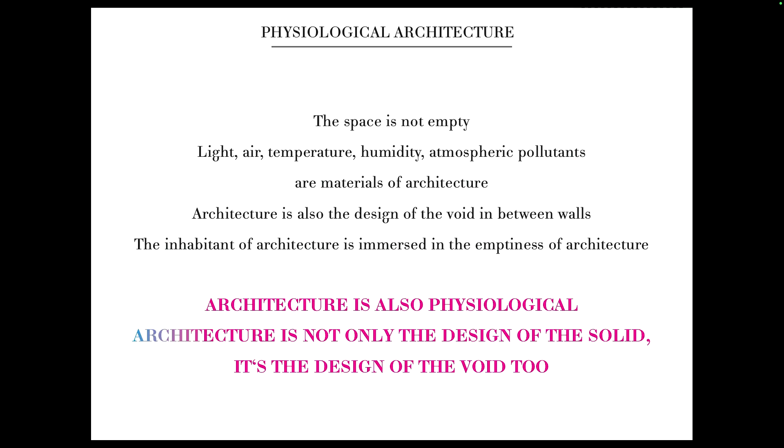I first opened an office in Switzerland called Decosterd & Rahm Associés, until 2005, and we represented Switzerland at the Venice Biennale in 2002 with this book, Physiological Architecture. At that moment, it was very important for me to explore the core of architecture, because everybody was talking about the wall, the image of a wall, but in reality, the target of architecture is the void itself, it's space, and so how to define space by the physicality of the space.

A first project we made in 2002 was for an artist, Fabrice Hybert, in France. In reality, here we were thinking that in Paris, during the winter, when you have a radiator, you are creating 20 degrees Celsius, so it's warm even when it's cold outside. Then during the summer, you want a more temperate climate when it's hot outside. In reality, it was like recreating in real time the climate of Tahiti in France. When you have a radiator, you are making a shift of latitude, bringing a climate that really exists on the planet at that time, but bringing it somewhere it doesn't exist. So we said, okay, let's take everything from Tahiti to France, in La Vendée.

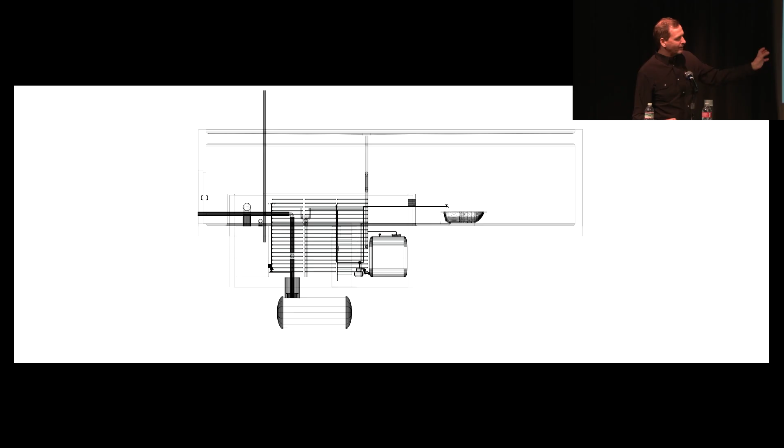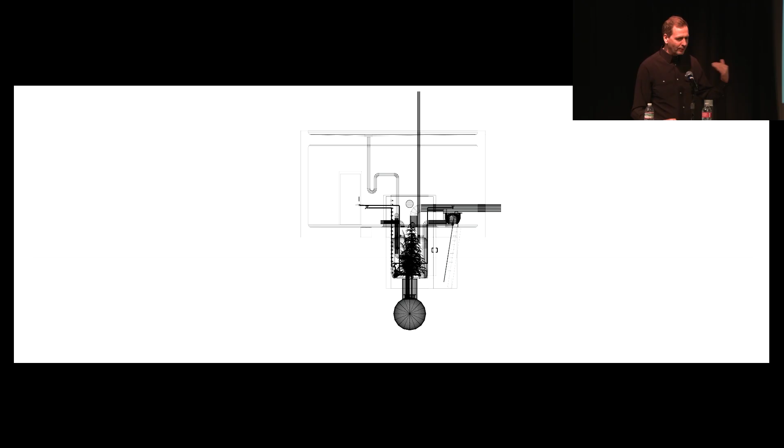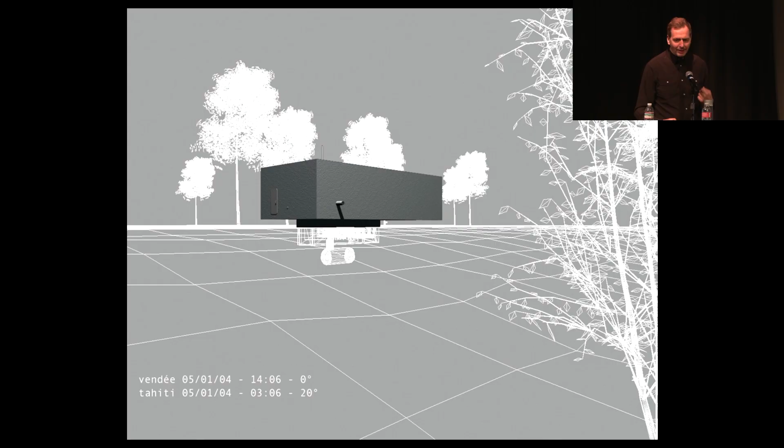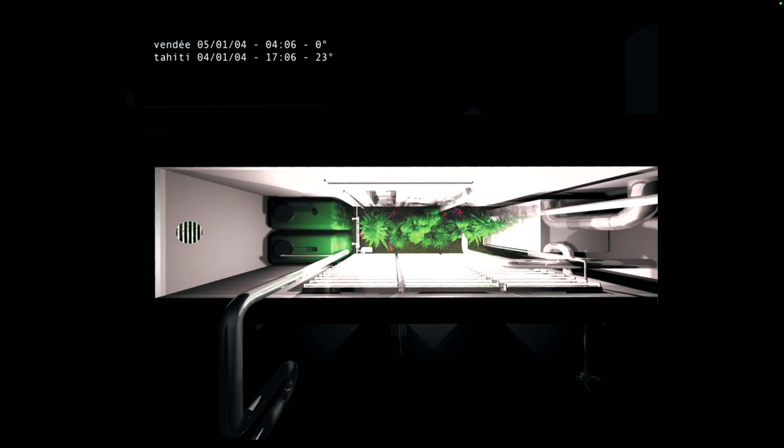We introduced that in the center of the house, producing light, heat, and also the smell and the plants of there. So the central heating room was like the main core of the house. It was like a house in jet lag, because it was producing light as if when it was midnight in France, it was noon in Tahiti. So it was like a machine turning like that. At the end it was completely opaque, full of thermal insulation, but everything was inside. It was like this jet lag house, working and creating the smell and heat of Tahiti in France.

Then in 2001, we were invited to SF MoMA, and here it was also this idea of how we perceive architecture. We often talk about the visual, but in reality there is information that goes beyond the visual, through the brain and through hormonal perception. At that moment, we were thinking about light. Light is a very common element of architecture, like in my time, Tadao Ando was known for very beautiful lighting. But lighting is not only aesthetic; it can be physiologic.

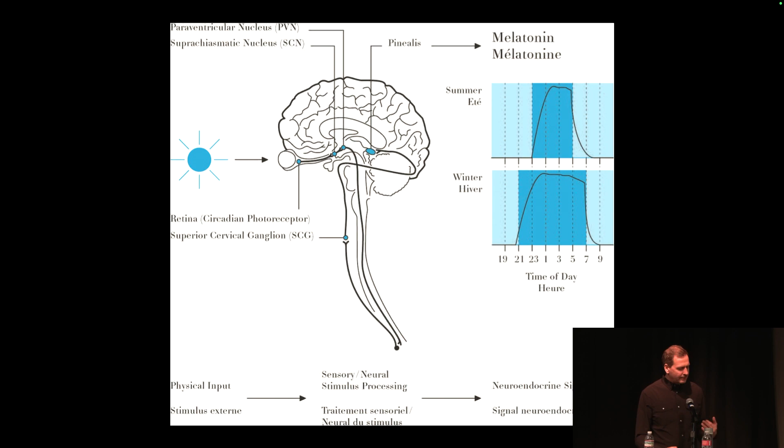We know there is a relationship with melatonin: when you have no light during the night, you produce a lot of melatonin. There was an experiment in 1980 by Alfred Lewy showing that if you turn on the light, it decreases secretion of this hormone, inside the brain, inside the blood. We know that very bright light blocks melatonin—at that moment the color studied was green, but then it became blue.

So we proposed to make a room that was no longer a social space like a living room or bedroom, but a melatonin room. One was like an exciting room—you went inside and it was blocking the melatonin. The other was emitting, more like orange or red—now we know it's very popular today, like night shift on your iPhone, which blocks blue light. But at that moment we didn't know exactly the wavelengths. I was part of a symposium in Eindhoven, around 2005, when some researchers showed the blue and the orange light. It was an interesting moment.

Then in 2002, we represented Switzerland in the Swiss pavilion, with the Hormonorium. It was like, okay, let's really work on the space, on the interior space, without talking about the limit of the space, but really on the matter of the space. And the space is not empty—it's composed of gases, of electromagnetic waves.

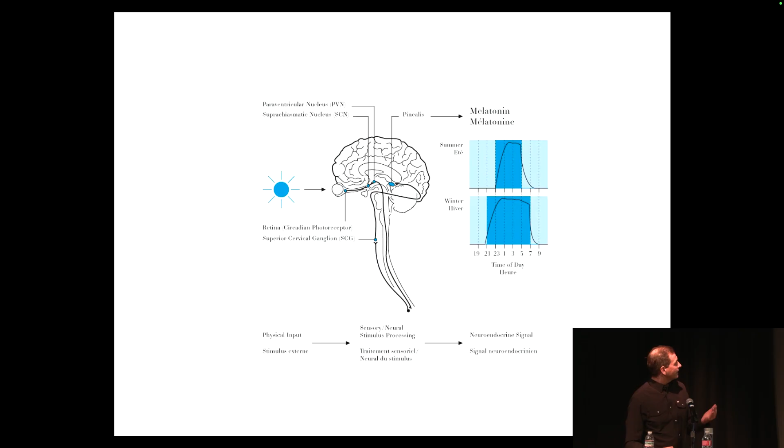And then we made this Hormonorium. It was working on two elements, and the perception of that was not in the visible, but like hormonal perception from the light, through melatonin. So we have a very bright light, and then we decrease the level of oxygen inside the space by adding nitrogen. So it was no more like 21%, like it is at sea level of oxygen, but only 14%, like 3,000 meters of altitude in the mountain.

So in reality, it's a little like going immediately - you open the door and you jump into the high mountain, and you have this bright light coming from the ground because you cannot escape it. You are receiving it, the melatonin is blocked, and you have this lack of oxygen. The perception of that was completely hormonal, no more semantic or aesthetic. I think it was just to say that architecture is not only aesthetic, it's also about health and pollution and things like that, so it was important for us to talk about this.

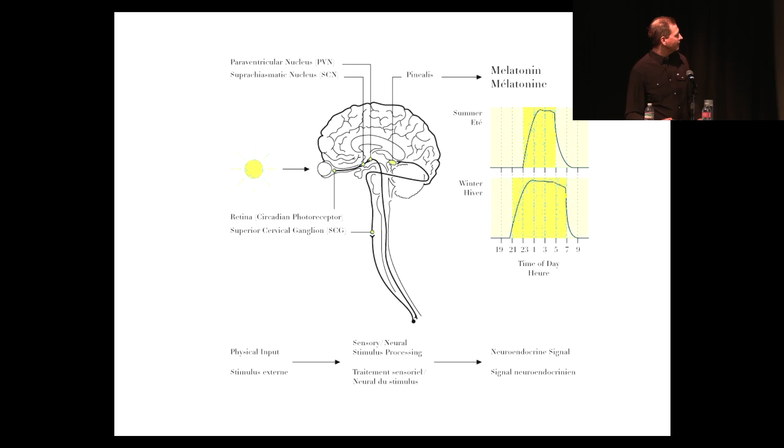So it was like somnambulism, living the night during the day. And this was the range - the blue light is blocking melatonin, and after 600 nanometers, you have no effect on that. So we chose these wavelengths, and emitted that in the space.

And then at the back, we created this kind of black cooling screen that was a little like the night vault, and then we reversed the music - you have the nocturne for the piano of Chopin, but it was invented by John Field. It's interesting because the invention of the nocturne, this type of piano piece, was invented in the same moment as street lighting, at the beginning of the 19th century.

And so the nocturne - you can listen to it during the day, it's like an evocation of the night. So here, by reversing, by creating diurne, it's like evoking the day during the night, something like that.

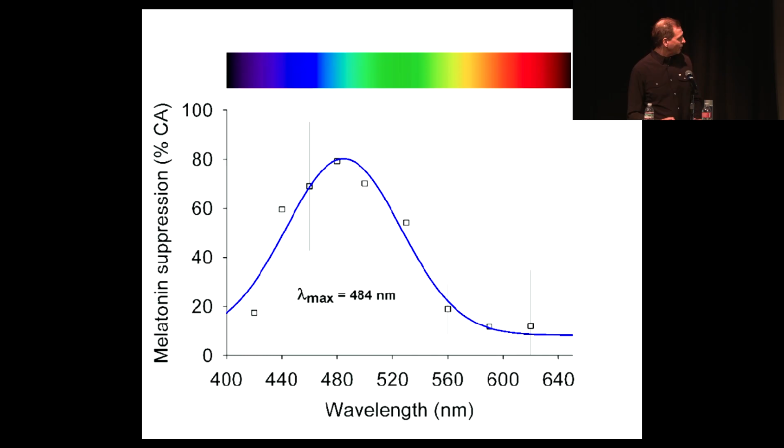Then we realized something like that based on melatonin, a kind of melatonin cafe in Taiwan. It's based on the yellow light being like the night, the blue light being like the day, and we proposed to make a cafe where you can move not inside space but inside time. So it's like time design.

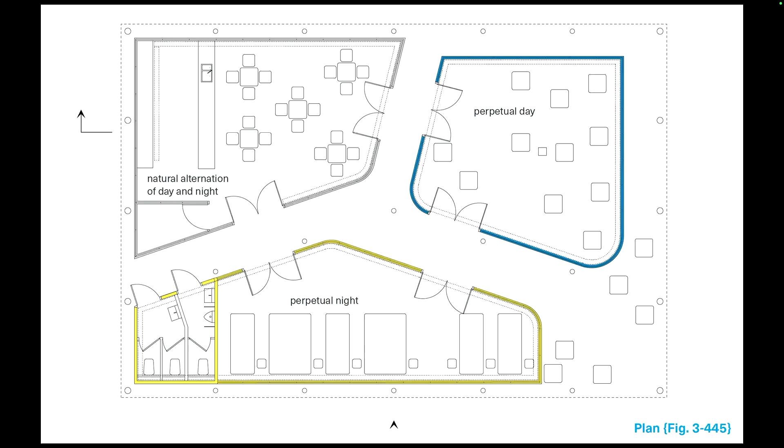So you can go into the night or go into the day, or go somewhere that moves with the astronomical cycle, and at the end it became like that. You can enter different types of rooms with different effects on melatonin. The yellow one has no effect on melatonin, and the blue light blocks melatonin.

Here, this is a project also based on wavelengths. We made that for Artemide, a lighting company in Milan, Italy. And the target was to create the most economic light with the most healthy lighting.

That's why the LED spectrum was better, and LED was only in the visible range. Depending on the semiconductor, you have different wavelengths, and this gallium is producing that. So you have different semiconductors producing different types of light, and when you assemble them, it creates a white color or some different type of color.

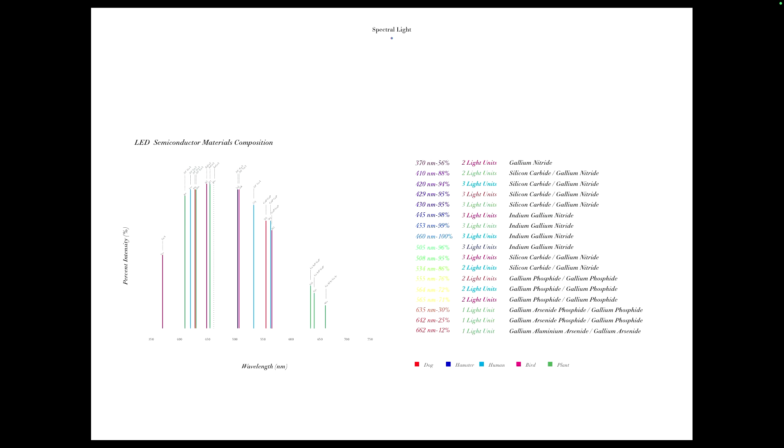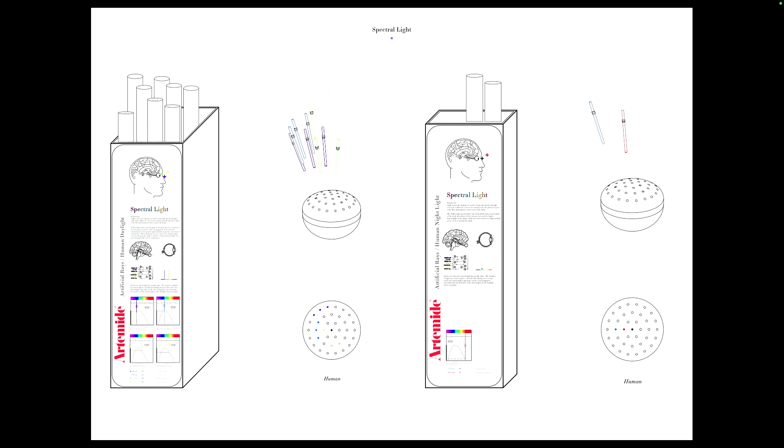And then at the end we proposed, okay, you can have light for human eyes, so you have three cones, three types of wavelengths. And then for the hamster, for the birds, and then you assemble all together. And then it becomes like a white light all together. And then you can decide in the house, you have that.

If it's only humans, you can turn on only the wavelengths for humans. If you have a dog, you can turn the dog wavelengths too. And then it becomes like that. For the show in Milan, we create like what are the wavelengths for a bird or for a dog. This is, I think, the vision of the dog.

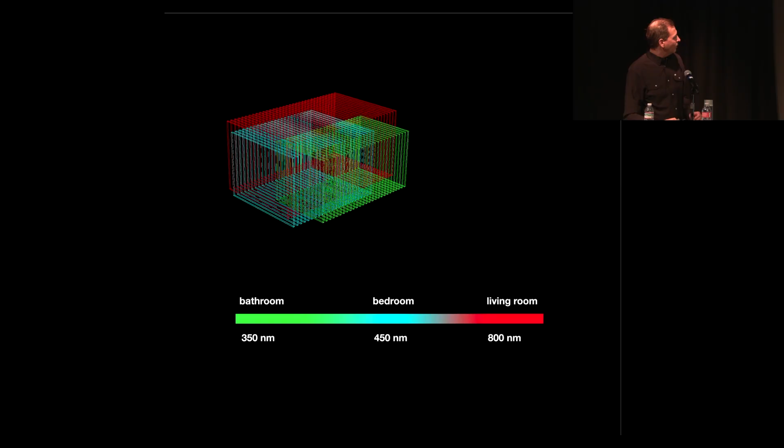It was also another project we made about wavelengths in Kitakyushu, Japan. It was the idea of ghosts, saying maybe if we want to make a 60 square meter apartment, but inside 20 square meters, we can do rooms, not different rooms in different space, but in different wavelengths. So we propose to have the bathroom in ultraviolet, the bedroom close to blue, and the living room inside red.

So then you turn it, so it was like that. When you turn the red, you only see the living room, like that. And then the black line, one line is the bathroom and the other one is the bedroom. So when you turn the other color, then you see the bedroom. And when you turn the other color, then the bathroom appears.

So everything was like the idea of ghosts in the 19th century, like there are different parallel dimensions, but on the same space. So it was a little like that, and then all together it's like that. And then the book was also, you can read a different story with that.

A project we made also on light was this winter beach. We proposed to rebuild a kind of beach during the winter, but by using only... at that moment I was reading a little of the 19th century, like Huysmans or Baudelaire or Jean Lorrain, this kind of literature. And the idea was the idea of synthesis, like to decompose the world, which came from chemistry, to decompose reality into elements and then recompose.

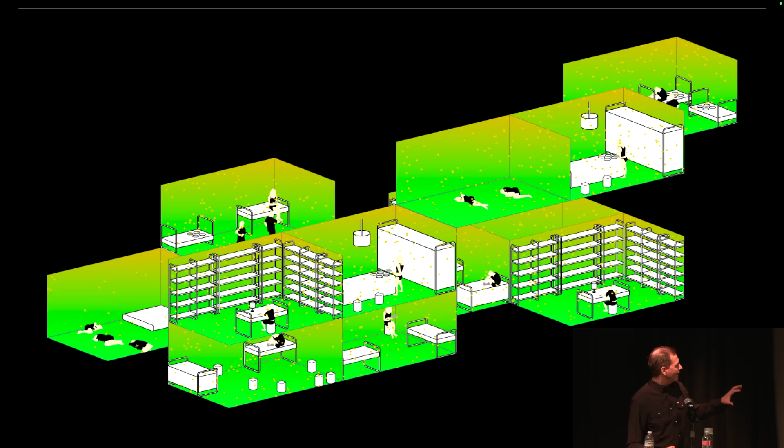So it was a little like this kind of thing, creating like - okay, you can sleep here because there is not a lot of light, but it's super hot and very dry. So what type of space is it?

This is this book, Climatic Architecture, and maybe this is closer to what I'm doing now. The idea is, okay, let's design directly with climate. Maybe we don't need to use geometry or metaphor - let's try to use emissivity for choosing a material, or let's use convection for composing a plan. I can show some examples of that.

Effusivity - this is, you know, the speed of exchange when you touch an object. So between materials, if you have marble, it becomes cold, you feel cold very quickly because it's a high effusivity material. If you touch wool, you feel warm because it's a low effusivity material.

In reality, this is something that was used before air conditioning or before radiators for heating or cooling. For example, all the marble floors in Italian churches were for cooling - you can find this described in Viollet-le-Duc or Claude Perrault. They talk about this kind of material. During the 20th century we think marble is only for showing that you are very rich, so you choose marble, but in reality marble has this kind of effusivity value.

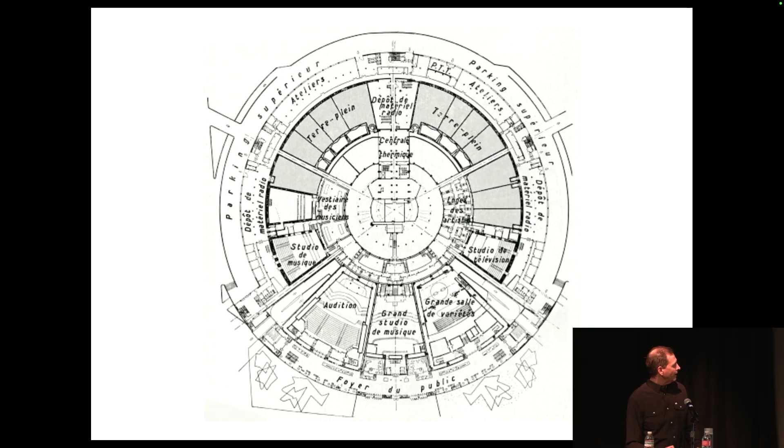For that project, which is a competition we won in 2017, it was for the center of the Maison de la Radio in Paris. They want to transform that into a kind of public space, with a cafe and some other public function.

And then we start with the cafe and we ask ourselves where we have to place it. Maybe during the winter you are looking for sun and heat, and during the summer you are looking for shadow and coolness. So we cannot just say the location of the cafe is good here, but rather have a kind of gradation.

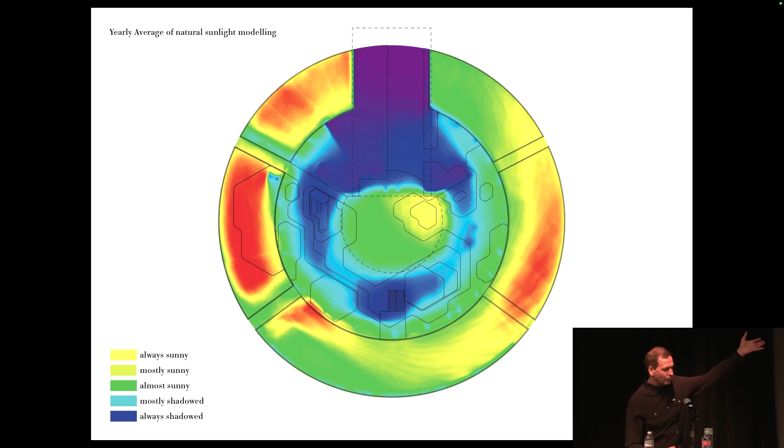So from that we made a solar analysis of the space, and we can see where it's red there is a lot of sun, more sun, like an average during the year. Where it's blue, it's mostly shadow. And from that we place, in reality, a gradation of the cafe from hot area to cold area.

And we materialize that. We choose the material to follow this climatic quality. We say, where it's hot, where there is sunlight, let's place some wool because it will be good for winter. And where there is no light, let's place marble because it will be good for cooling. Then it became a choice between wool, a low effusivity material, and a high effusivity material.

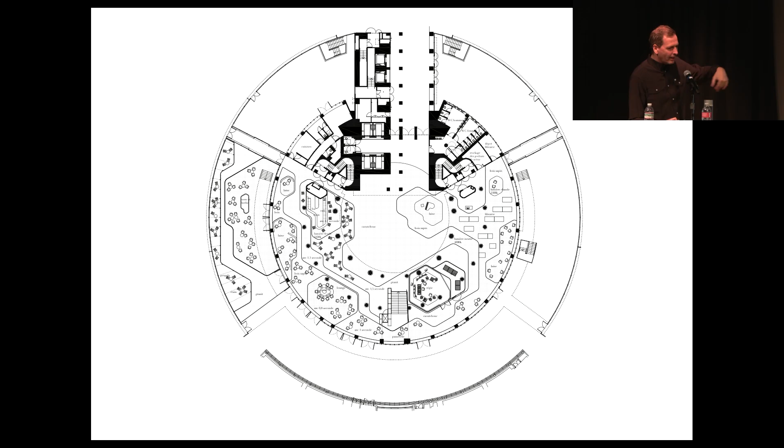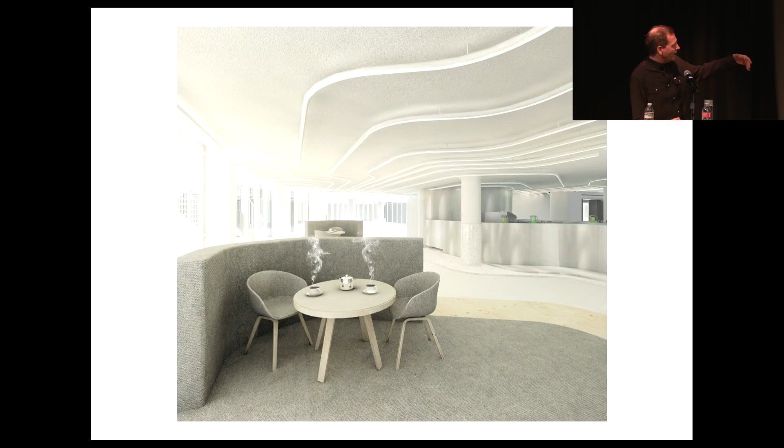So there is this type of gradation following the line of the light model, and finally we can see that. This is the sunny area where you can find wool, so it would be very comfortable in the winter, or maybe in a cloudy summer day.

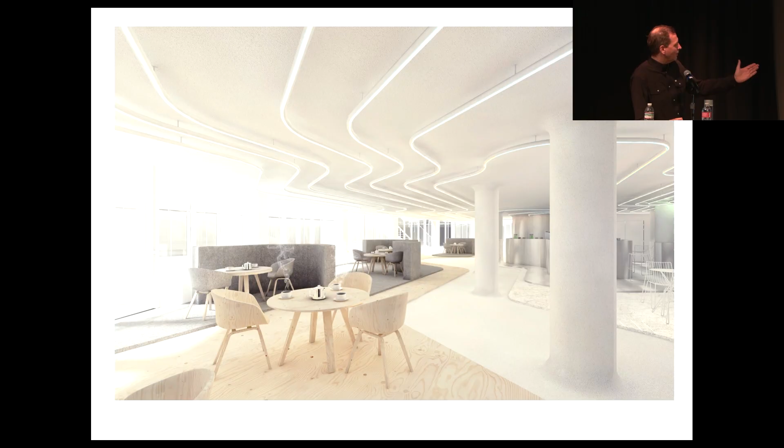And then we move to the wood, with a little higher effusivity, and then we arrive to the marble, and then the most high effusivity, like le zinc. It's typical Parisian, like the zinc, in the cafe.

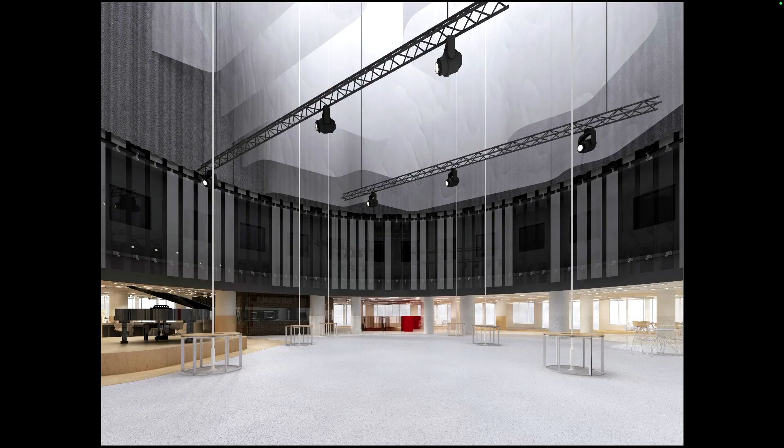Another point about convection, how to design with convection. So convection is like the hot air moving up, and it's also a way of cooling by having some air moving around the skin. So by convection we made a different project.

We were talking about Domestic Astronomy, an exhibition we made at the Louisiana Museum, about how to economize energy. In reality, nature sometimes is not so ecological, because the hot air is always moving up, so during the winter you are always cold because we are down, and the cold is always down, and the heat is always up.

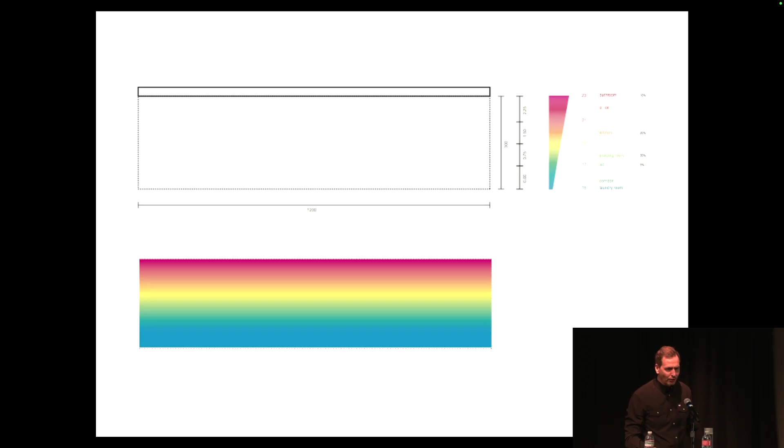So we are not placed in a good way, because if we are cold on the feet, we turn on the radiator, but in reality everything becomes hotter under the ceiling, not on the feet. So from that we say, let's work with this idea that in reality the function should not be placed on plan, but on section, on the altitude linked to the convective movement of the air. The hot air is up, and the cold air is down.

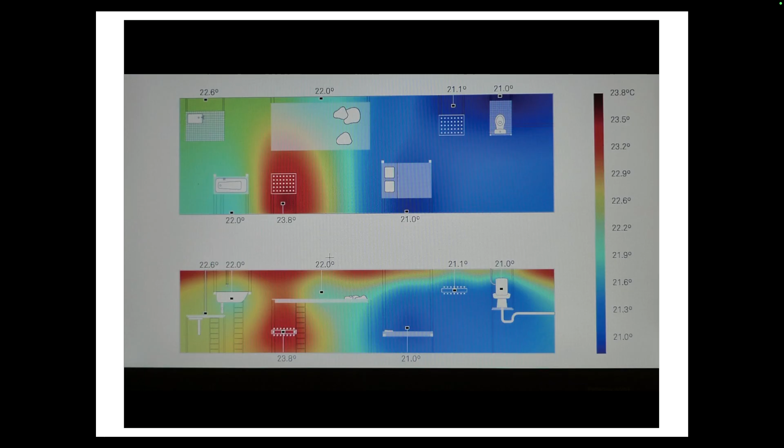Depending on the function, for example if you are naked and take a shower, there is some recommendation for having a higher temperature in the bathroom than in the bedroom. So we say, okay, let's place a bathtub close to the ceiling, and we can put the bedroom down to the ground, and then it became like that.

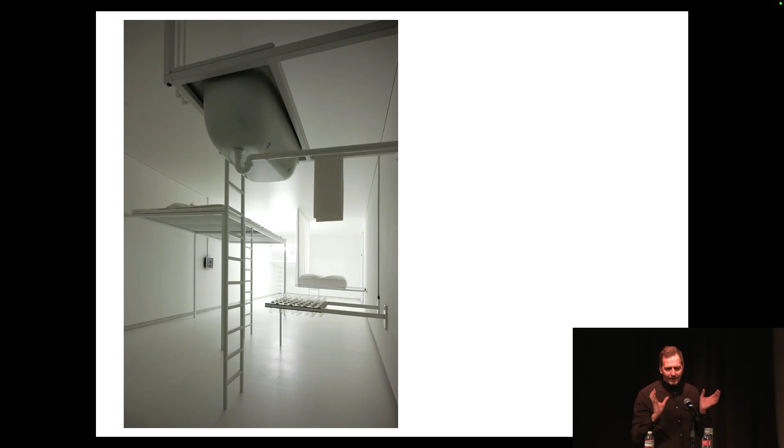So it's just to economize the energy, because naturally we have a lot of heat under the ceiling, so let's go under the ceiling. So it was like that, and we can see this different altitude with the bed going down and the living room a little lower, like that.

And then we made a project for the artist Dominique Gonzalez-Foerster for a house. It was based on that. Because there is some recommendation in Switzerland to say the corridor can be at 15 degrees Celsius and bathroom at 22 degrees Celsius. So we say there is this range of comfort, let's place a radiator for producing 15 and another one for 22.

Because the hot air is moving up, it creates an atmosphere with different values, with these two radiators as the polarity of the low part of the comfort and high part of the comfort, 22 and 15. This creates convective movement of air, and we can see different types of temperature created in the space, and we place the function according to that. So the bathroom in the hotter area zone, living room in between, kitchen there because we are moving a little so we don't need to be at 22, and the bedroom a little colder.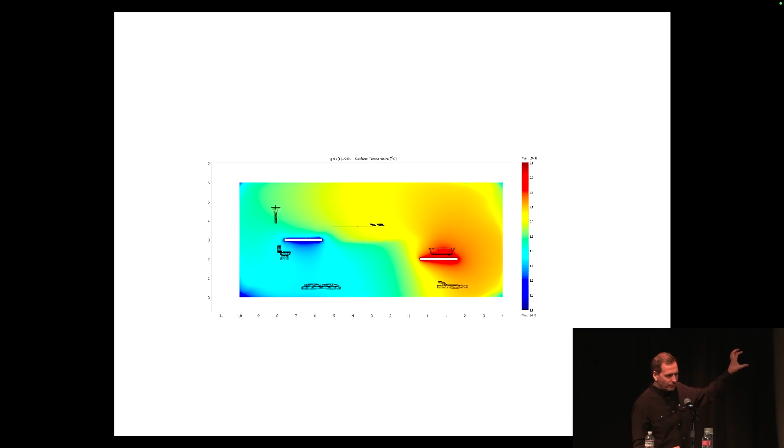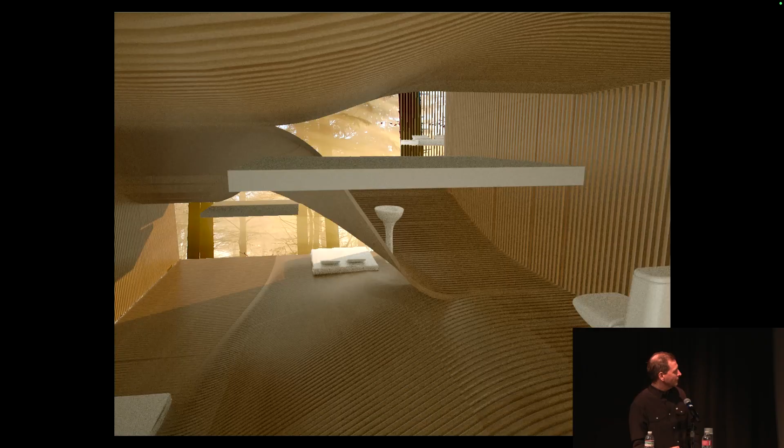And we place first the object, the furniture, and then we connect that with the floor, but the floor has to have holes, you know, to let the air move everywhere, like an atmospherical interior. And so it became a little like that, with this kind of open.

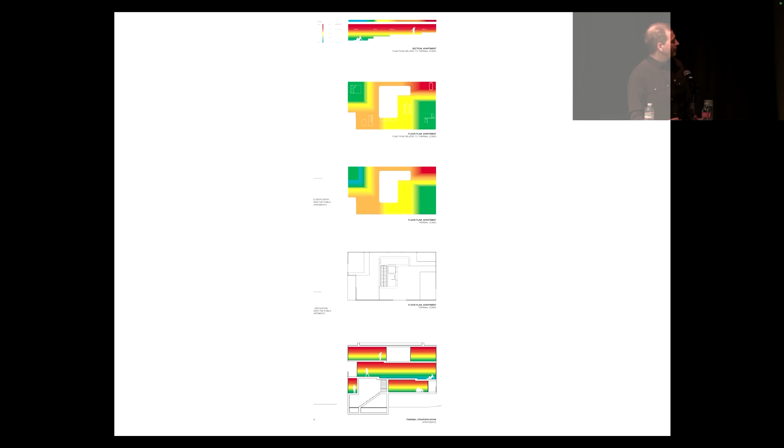Yes, and we made another project with that for Hamburg, where in reality you can move up into more warmer layers and go down into lower ones. So there is this kind of winter area or summer area. It was like that.

And then this apartment, so this is some Swiss recommendation, 22 degrees for the bathroom, 15 for the toilet and the other. And then here we also place the sinks according to heat. So we can see the bathroom at the top, kitchen down.

And then we propose to have the sofa for one person a little higher than the sofa for two people.

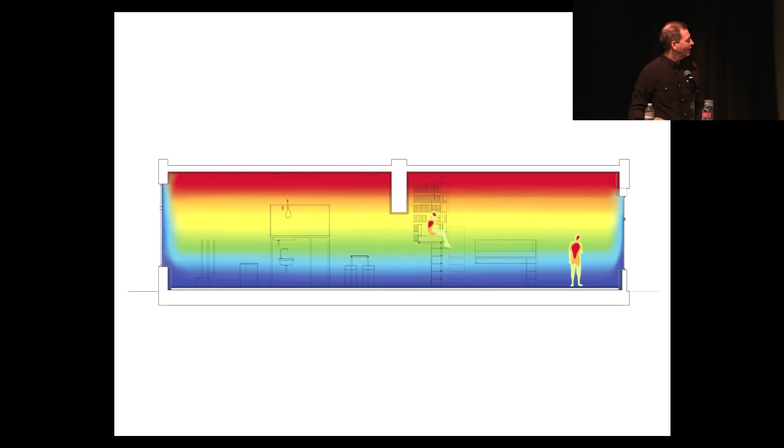And then there is also something about humidity. You know, if you have one ventilation system, you have to bring the fresh air in where you don't produce a lot of vapor, so it's more the bedroom, and then it moves to the kitchen or to the bathroom. So in reality we place the kitchen and the bathroom together, because this is where humidity is produced, and so it's challenging the way of organizing the house.

No more in terms of social convention, like saying that you have the night part or private part and public part in the house, but here it's just linked to humidity. You have the humid part and the dry part, and maybe it's reorganizing more according to climatic issues, and maybe it can also reorganize as a kind of social consequence of that. So it was like that, more dry, more humid.

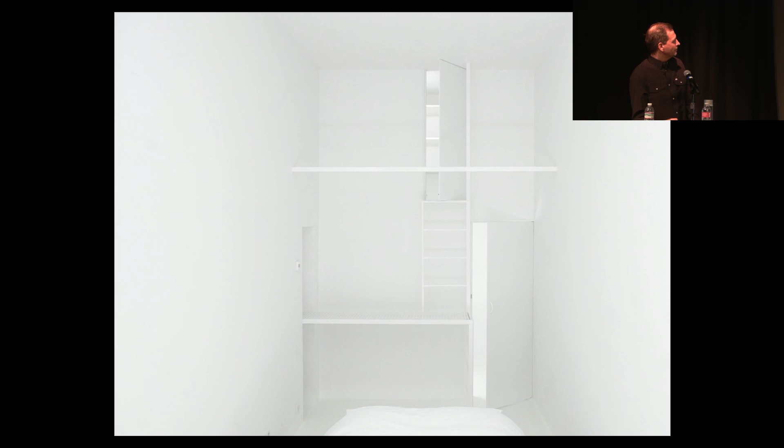Okay, and then also based on convection, we made this competition entry for a university building in Lausanne. We got the third prize, and we used some convective principles of Palladio.

It's really interesting to look back at this project, because when I was a student, it was explained in a very esoterical way about perfection of proportion, with a kind of body lying in a square and a circle. It was very complicated to understand what it was about, but in reality, Palladio wrote a book, the four books of architecture, and he explains exactly the reasoning behind the plan.

He says, in reality, if there is a south, and if the south is here, the sun moves like that. So during the winter, you are looking for the sun. This is like the morning side of a room, because you have the sun here, and then in the afternoon you can go there. But then he says in summer you don't want to receive the sun because it's too hot.

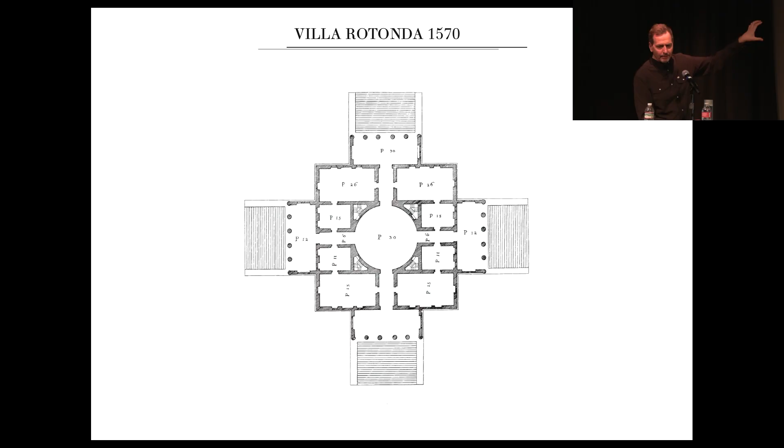So you go here in the morning on the west, because there is no sun, and you are on the northwest. And then in the afternoon you go here. So you go to the shadow during the summer, and you go to the sun during the winter. And so this is why it's symmetrical, because you migrate between rooms depending on the day, the moment of the day.

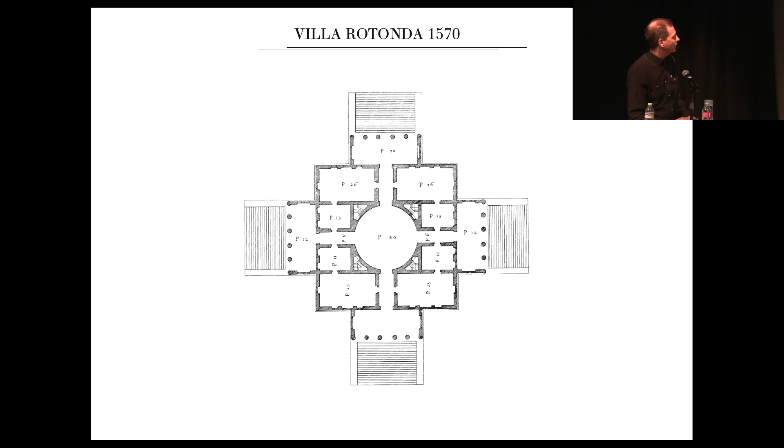And then he also says you have to align window, door, window to have cross ventilation. So he places this portico to protect, to have no light in the center. And then he took some inspiration from the Pantheon in Rome, and you have a hole.

During the 20th century, the explanation for the hole was also very strange, with some mystical light coming inside. But in reality, it's just to let the hot air escape, because if you close it, it becomes super hot inside. It's like when you cook, if you have a lid on the pot, it becomes super hot. If you open it, the heat goes out, and this is the same.

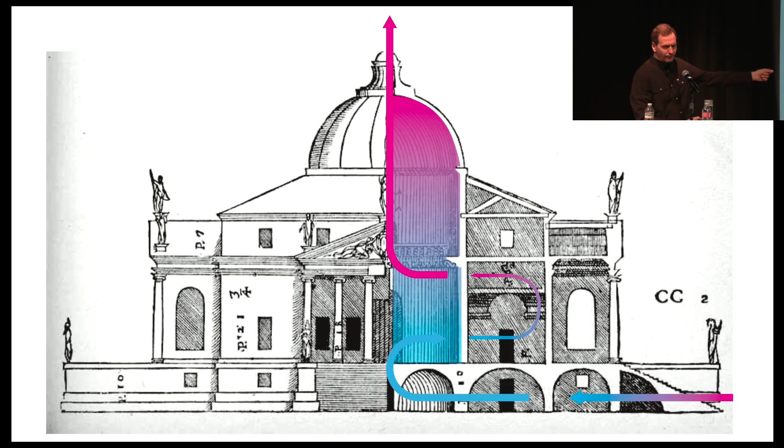You have a hole to let the hot air go out, and so he made that, and then he introduced fresh air down in the underground. So there were other houses built at the same period that introduced air this way. They call it a ventiduct, like an underground cave, and the air is cool underground, and then you have a hole in the middle of the room, and it creates like a fountain of cold air in the middle.

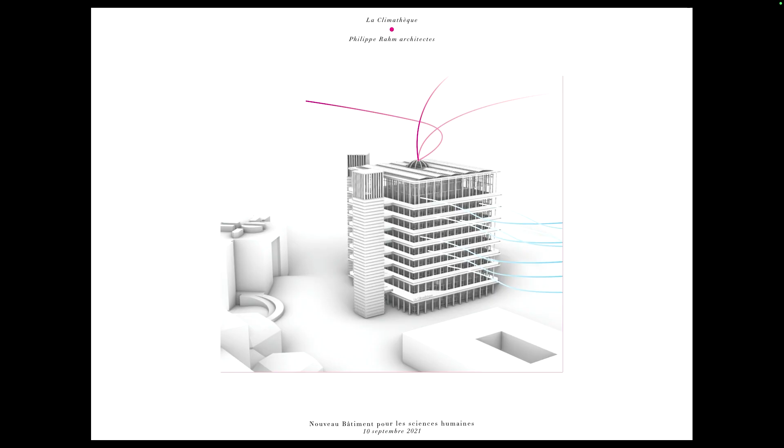So here we can see this stone that has holes, so the cold air can go out, and then the warm air can escape to the top, so finally it's a very climatic machine, this house of Palladio, with its link to the sun and to the air. We took inspiration from that for this building. Here we have just ventilation — you can open the window in spring, and then the hot air goes out, like Palladio, like going out.

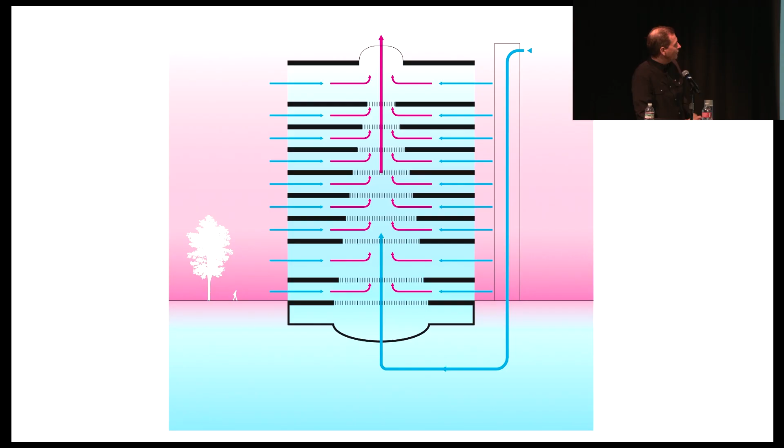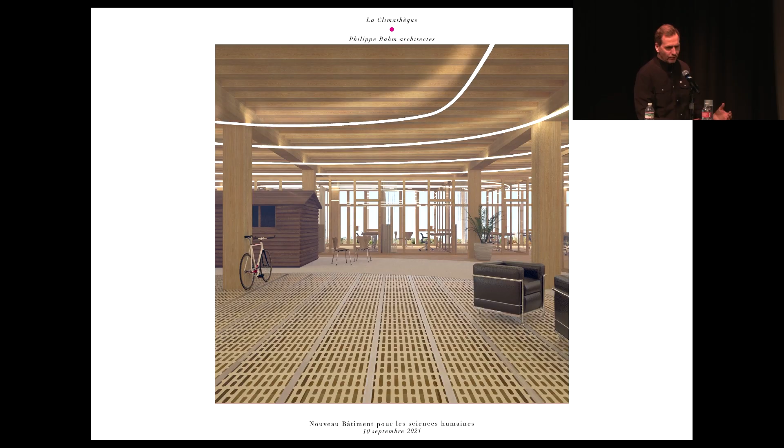We made the same type of stone with holes, with a floor where air passes through. Here we are, in a certain way, removing the duct of ventilation - we are using the building itself as a duct.

Then during the summer, or when it's super hot, we go down with geothermal cooling. In reality, the university is built on the lake of Geneva, so 3 meters underground you have water, and then we propose to make...

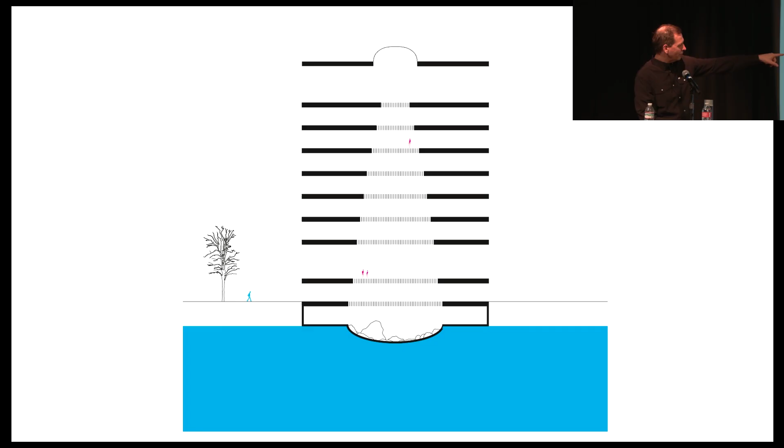Holes in the ground, so during the summer you can open and let the water go inside the building, at the base, and then you can introduce new fresh air from underground - it becomes like a water pipe, or like a narghile.

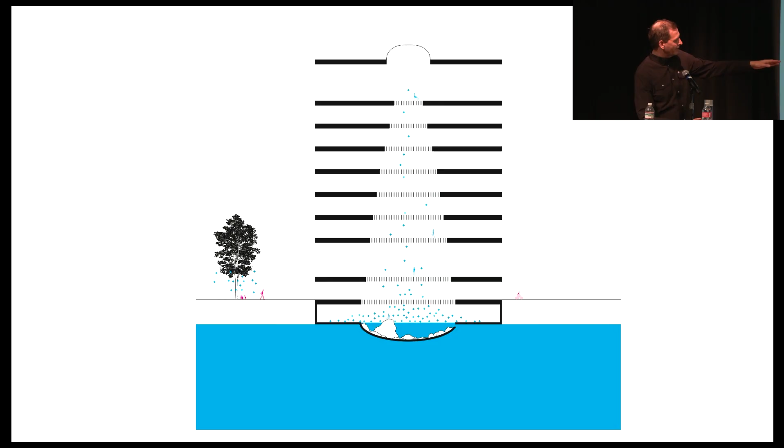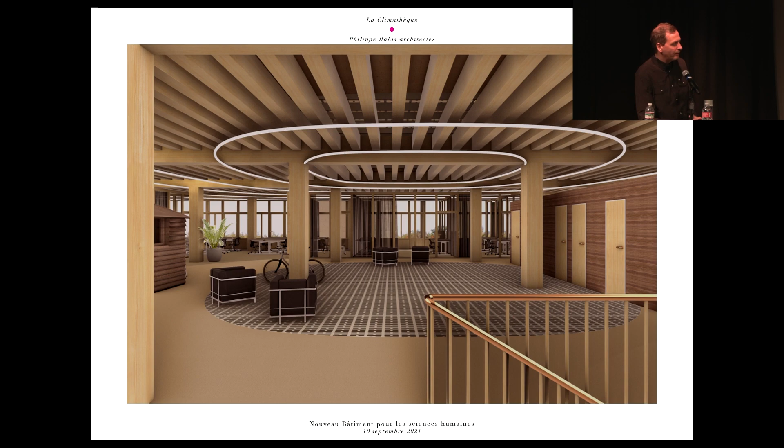It's like cooling the air by evaporation, by thermal inertia from the underground, and then by evaporation there, the fresh cold air during the heat wave can go into the different rooms. So we can see the section with this kind of internal lake, and the new air arrives from there.

Another topic is about radiation - I can show how to design by radiation. So we made something for the Luma Foundation in Arles, about how to place space according to the existing light in order to decrease the consumption of electricity.

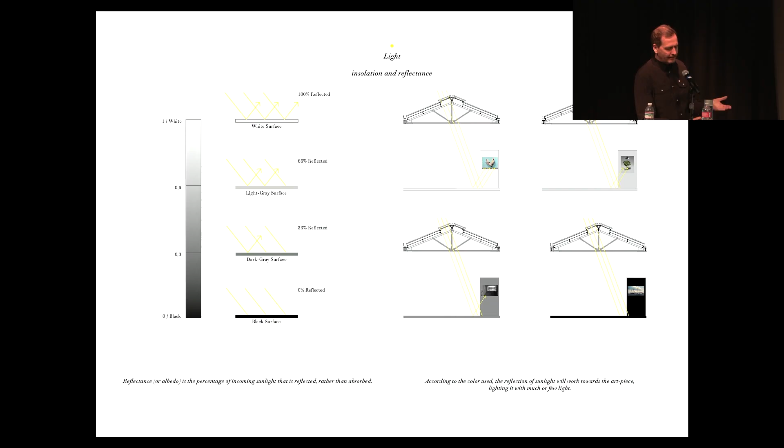Here we analyze the incoming light, and then depending on the type of ground, it increases or decreases the light. If you have a white floor, it becomes brighter. If you have a black floor, it becomes darker.

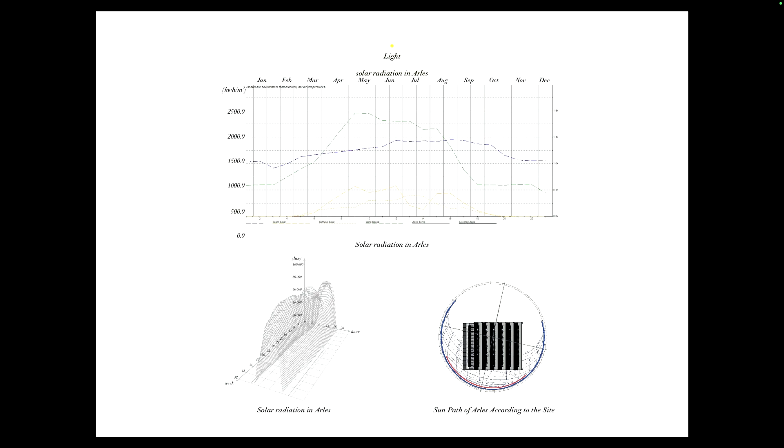So we made a simulation, and we see that here in blue there is mostly shadow in the morning, and then in red there is a little more light - this is at noon, this is in the afternoon - and then we mix all together.

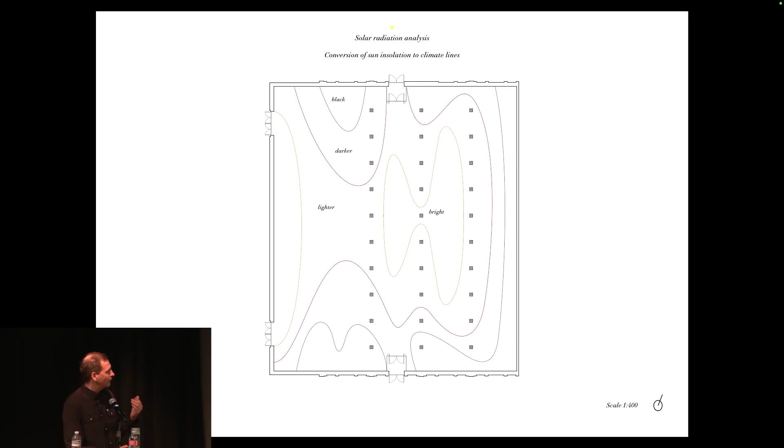We find that here there is naturally more light, here naturally less light, so we can place different artwork depending on the quantity of light each location receives. We increase that by painting the floor white where there is already a lot of light, and black where there is no light.

And then it became like that, with this variation, this gradation of different gray tones.

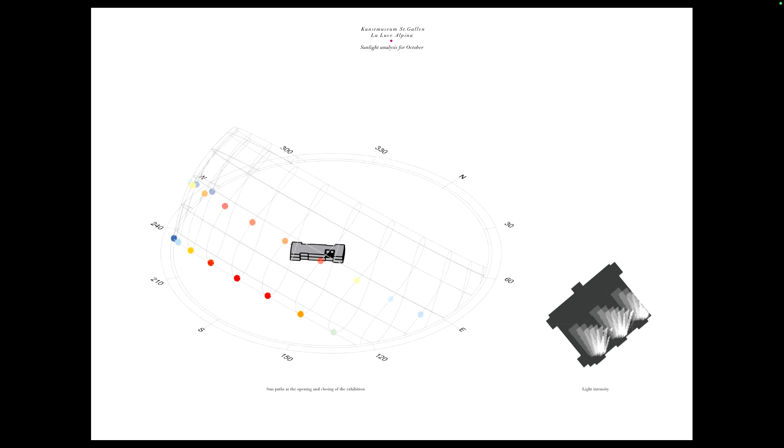Maybe a last project here, an exhibition we made in Switzerland. It's for increasing the light, and so we made an analysis of a building where the sunlight enters and where it touches the ground according to the moment of the day.

We can see the different... we see the 3 windows, and this is like in the morning, and then we increase it - it's like creating a carpet that reflects the light to increase the quantity of light where the sunlight touches the ground through the windows.

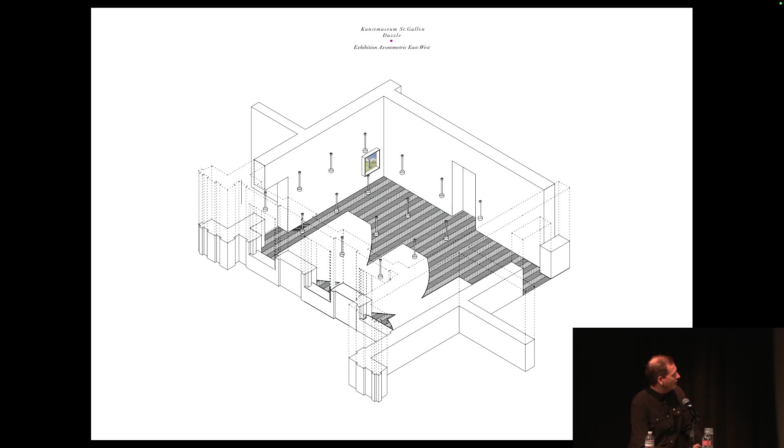And then it became like that in plan, and then it was like that, increasing the quantity of light only by following the ray of light through the window. Okay, I think maybe I don't know if I present something else, or it's okay.

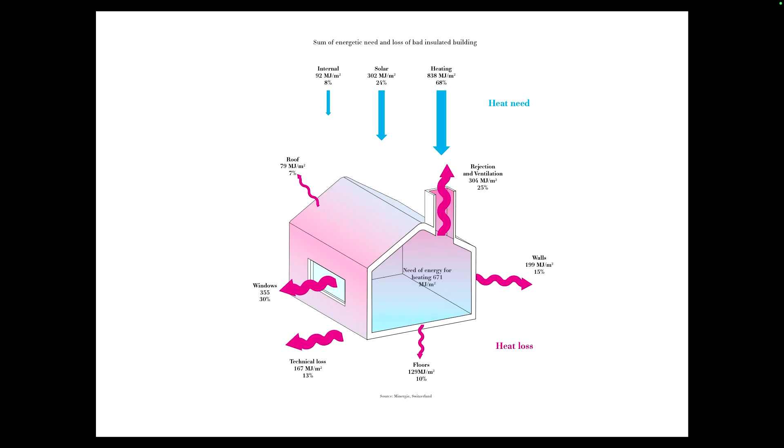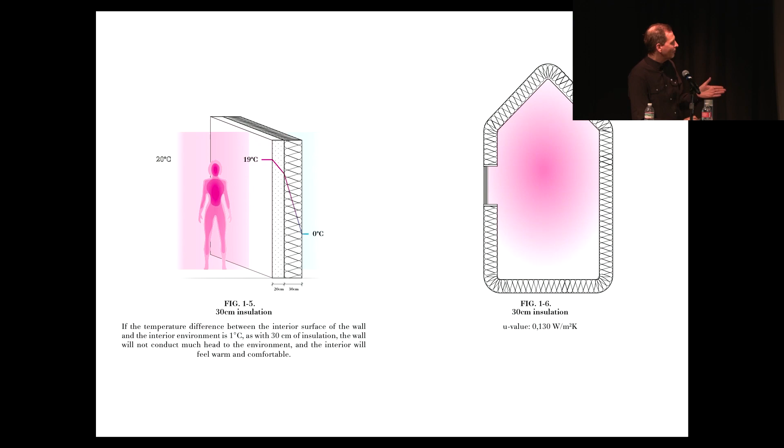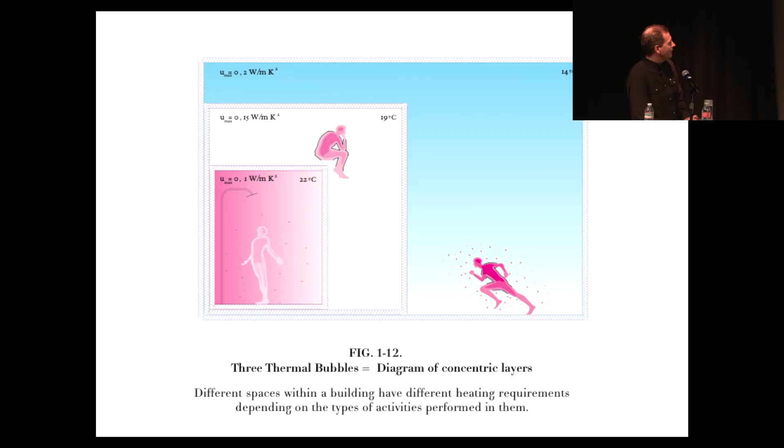Or maybe I can just go quickly through conduction, like something about the layers, and how the contemporary facade is made of different layers - thermal insulation, vapor-proof membrane, rain membrane, load-bearing layers. Normally they are all together, but we can split them and start to live in between the different layers. So this is some different projects we made based on that.

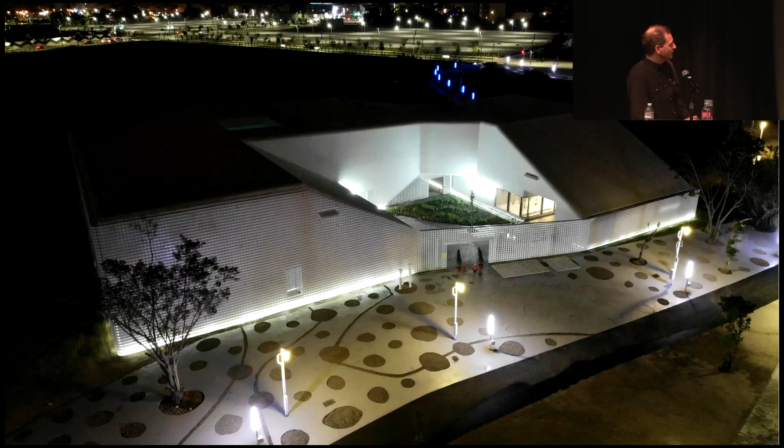And then the project in Taiwan for the climatorium is with these different layers there. Inside this climatorium, we recreate 3 rooms - one is like reproducing the climate of the mountain in Taiwan.

And the other one is reproducing, yes, I can just show this Anthropocene style. So how to choose a material according to climatic value.

When we look before air conditioning and before radiators, in reality all these elements have a kind of thermal task. For example, the paravent, the screen, is against cooling by wind. In French it means against wind, paravent. And then the curtain was also against the wind inside, the cooling wind inside the house. The carpet is like a low effusivity ground to keep that. The tapestry and maybe the painting was also a kind of thermal insulation.

The chandelier full of crystal was to increase the small light of the candle. The mirror and also the golden painting was also to increase the quantity of light. So a lot of decisions were through practical ideas, and we completely forget that when we start to receive a central heating system with fossil energy and air conditioning. It's all this, the low effusivity carpet where you sit, where you place your feet, and all this kind of protection and things. And of course, after fossil energy arrives, you can remove all this carpet and tapestry because if you are cold, you just turn on the radiator.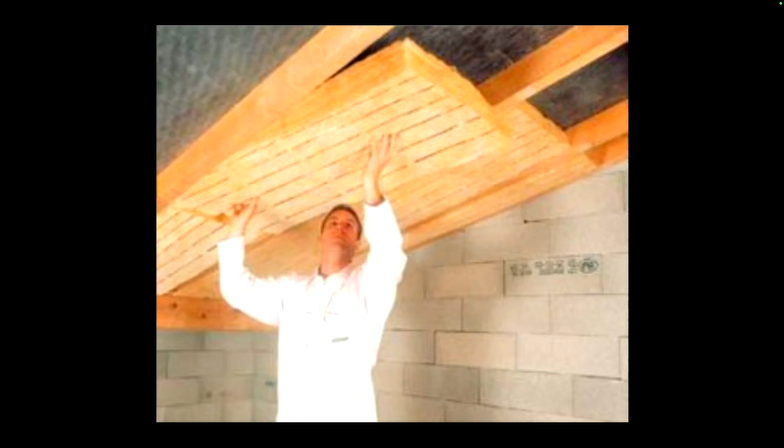So the idea of the Anthropocene style is to say, okay, this type of thing is no longer available today because we need to place thermal insulation again. And in reality, the thermal insulation, or this kind of vapor barrier or airtight membrane, is in reality like the tapestry before, or the screen before, the curtain before. So this is like a new type of tapestry.

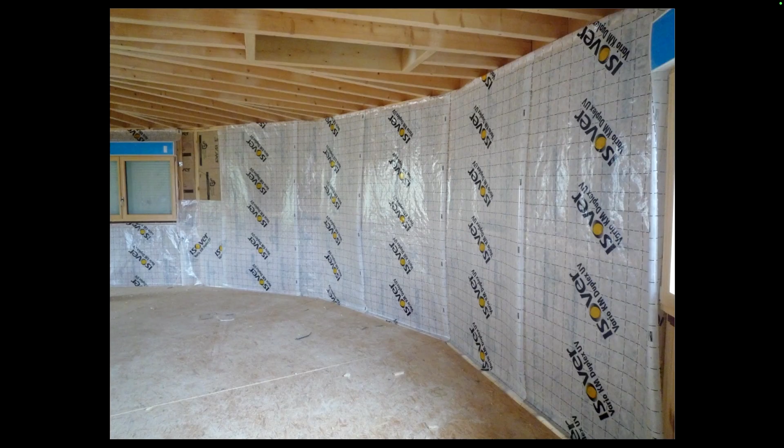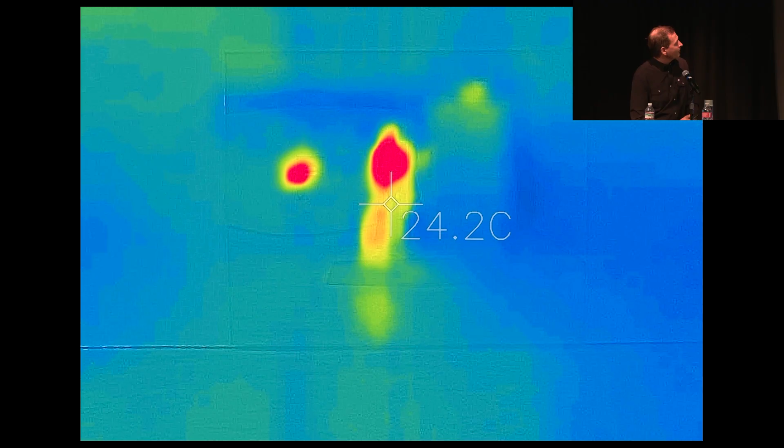So we have to imagine that decoration is coming back, and we, as designers, have to accept this as a new reality of the interior. So let's design with this kind of new beauty coming from this necessity to not use so much energy for warming the building, by understanding emissivity, effusivity, and thermal inertia value, this type of things.

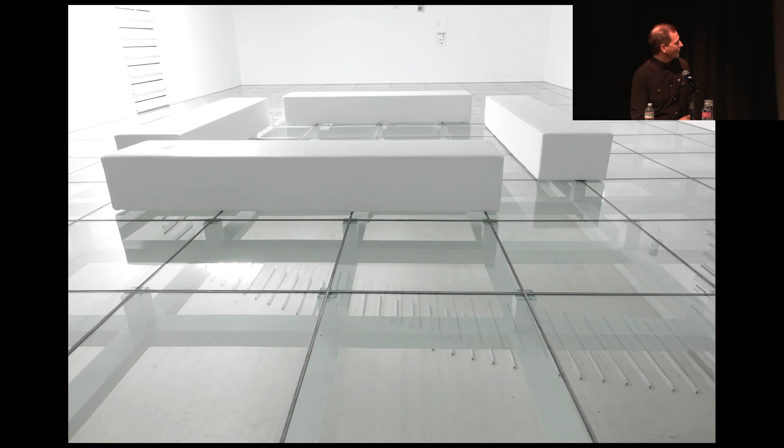Okay. I think. Okay. Maybe me. Okay, let's see what there is after that. Okay, just I will finish with that.

So here, the idea of inside and outside, in reality we can understand that when you are doing a roof, you are creating a kind of interior. And here in Taiwan, the sun is really strong because you are close to the equator, so you feel the strongness of the sun. So what we are proposing here is to cover partially the space with 7,000 square meters of photovoltaic panels, so it will produce electricity and reduce the quantity of light down.

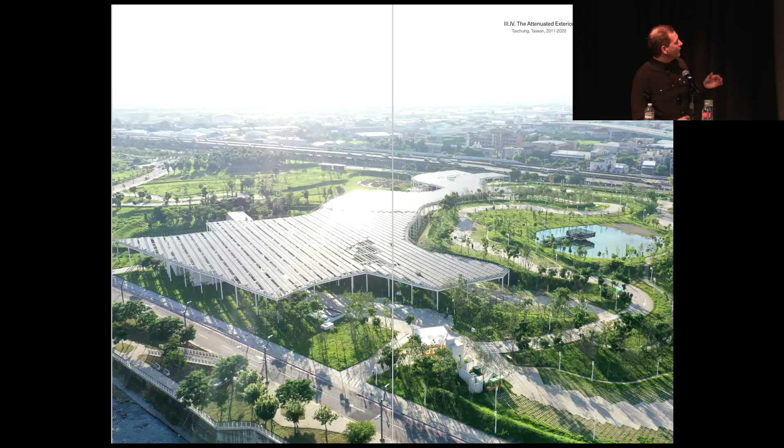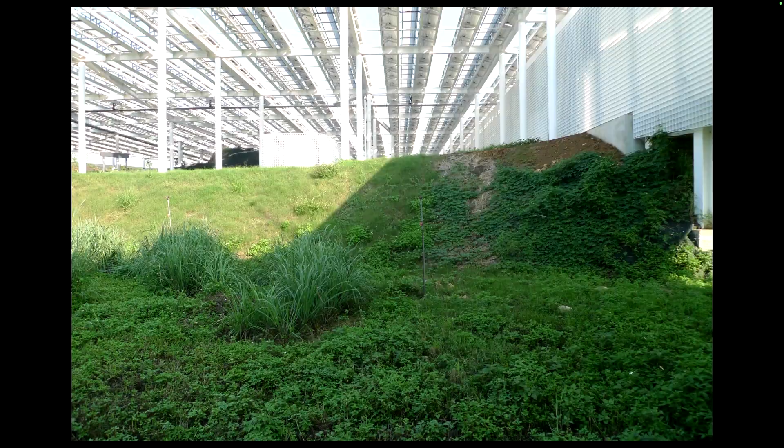And so we call that attenuated exterior. You can go under, and we are creating like a landscape under, with also some buildings. So it's a little like exterior, but this afternoon you talked about this in between interior and exterior. It's a little like that.

And then the building also is, we say, okay, here we need a protection for the material, this is for the, with some machines, so people cannot enter, but okay, the air and the light can still enter.

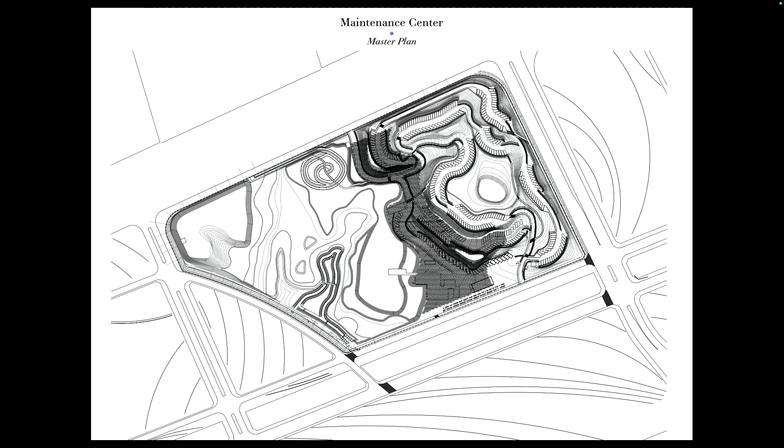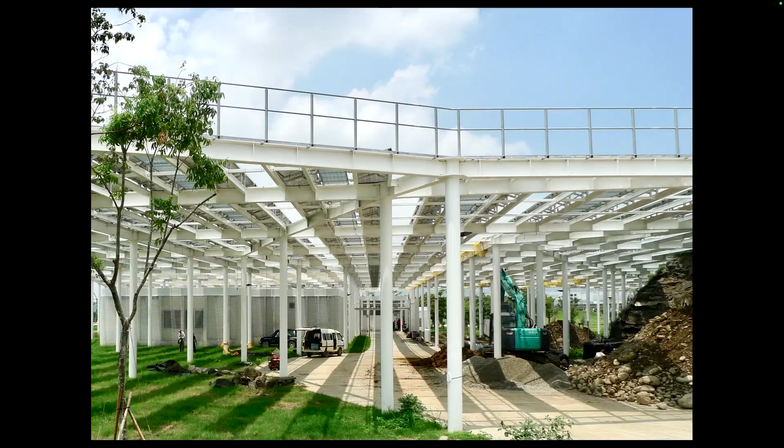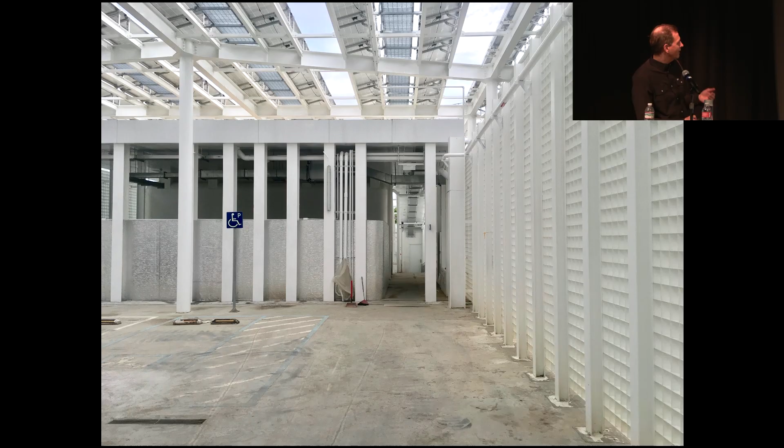So we can see this kind of layering of the space. We are entering here, and then here you can see the waterproof layer, and so still there is no air conditioning, it's just protected by the... and then we are entering the thermal insulation, and like that here.

Okay, so thank you very much.

You want to answer questions? Mm-hmm. Yeah. Are there any questions in the audience? It's been a long day.

Thank you so much for this beautiful presentation. Since you landed us here at global warming, I'm curious to hear you speak about how your work goes beyond the body, beyond interior spaces, thresholds, and how we move and feel, to a much larger scale like the landscape project you showed. I'd love to hear you talk about that.

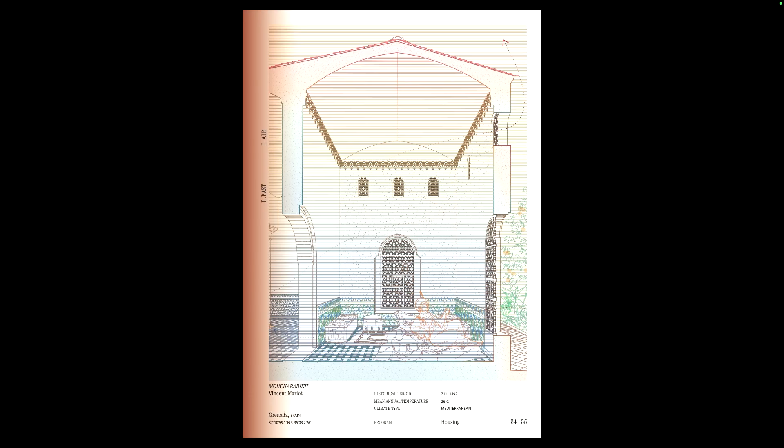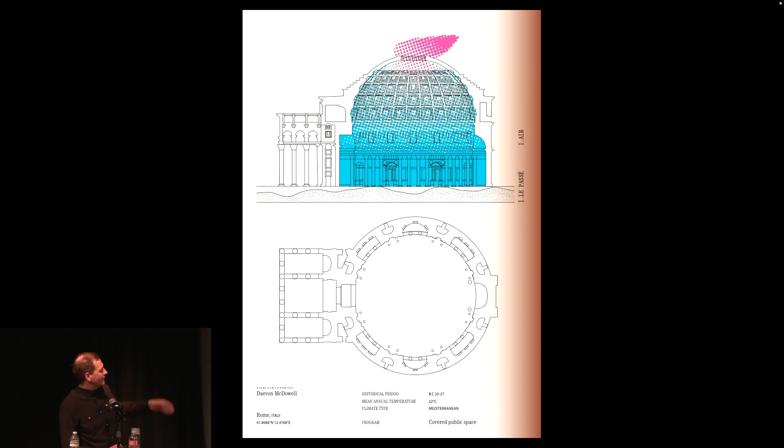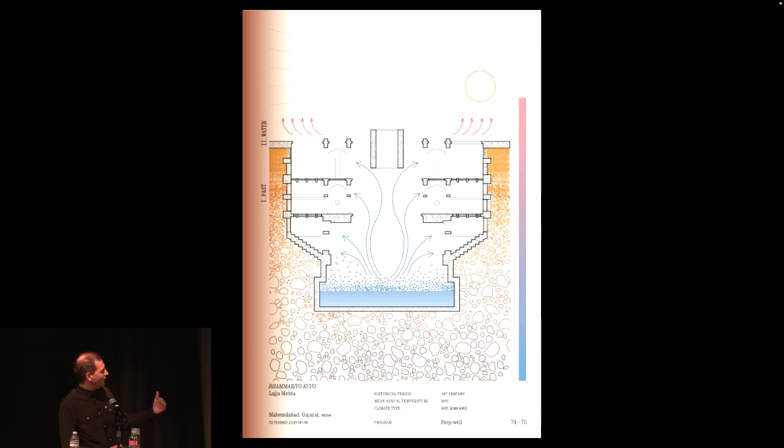So we started looking at how cooling was done before air conditioning—for example, high ceilings that let hot air go out, or cooling by evaporation. You know, in Morocco or India, they have fountains that cool the air, so you can have interior fountains for decreasing the temperature. This is the kind of thing we have to consider today at the architectural scale.

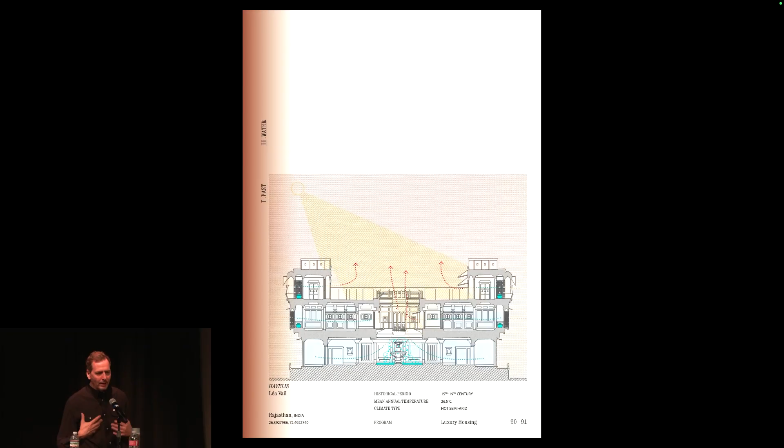As an architect, you have to provide space where people can survive, and maybe the climatic mission of space is becoming more evident today than during the 20th century.

Thank you for this presentation as well. I had a question: a lot of the projects you showed earlier dealing with light and temperature were in environments where the interior was controlled. In the project you showed in Taiwan, the cafe, where you said you were designing time, what challenges did you face with exterior conditions like light and weather inside spaces that were encased in glass?

Yeah, there is something paradoxical when we started our practice. At that time, we understood that to make the most ecological or sustainable building, you had to make perfect thermal insulation and seal the interior to reduce energy use, because if the insulation isn't good, you lose energy, and if it's not an air-proof space, you also lose heat through gaps.